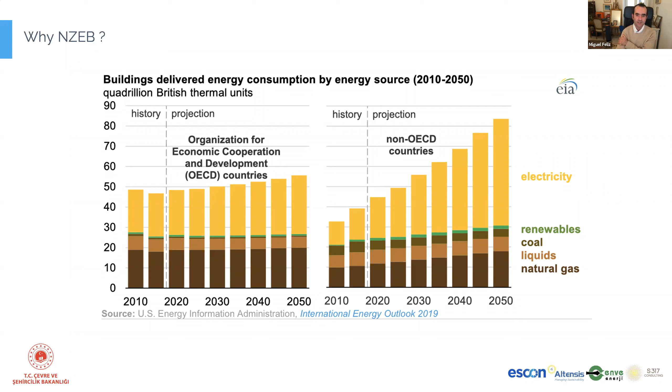Every country has buildings in their wish list for energy outlooks. Turkey has a plan, that's why we are here. Portugal has a plan. Everyone wants to keep the building sector in check regarding energy consumption, especially in the future, and the trend is really clear.

So it's 20 to 30% of the total energy use, depending on the source that you use, but it's 30 to 40% of the carbon emissions. It will grow, and all the reduction targets will require that buildings reduce consumption, or at least keep it steady in the near future.

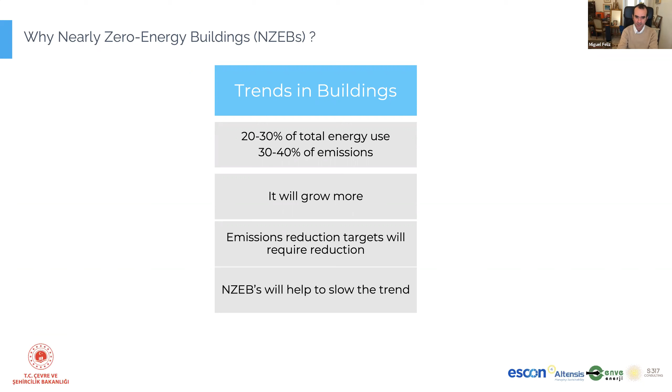So net zero buildings will help slow this trend, and that's why they keep popping up in all the conversations regarding buildings and regarding energy. So firstly, this is important to set the conversation.

What is the N in the nZEB sentence? So it's net, it's nearly, it depends a lot on the source that you use, the country you are in, or the idea that you want to represent. For example, in the United States, it's the zero energy building, so the building must be completely with a zero balance between the outside grid and the energy consumption.

The Green Building Council is slightly different. They only say that the building is highly energy efficient and is fully powered from on-site or off-site renewable energy sources. And in the European Union, the concerted action of the EPBD, which is the directive on energy efficiency in buildings, says that 40% of member states don't yet have a definition.

So what I'm trying to say here is that the definition of net zero or near zero in buildings is a fluid definition. So what we're trying to say is that they must be efficient, and there's always a role for renewables to offset the consumption that buildings have. And then there's always a question: are we talking about final energy, primary energy, or emissions?

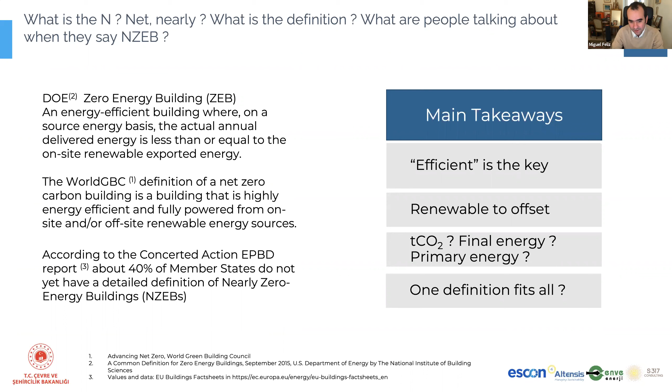It's not possible to find one definition for all geographies and for all the entities that relate to this. This is important because near zero, net zero, above all, is an idea, a concept that can relate to reality, to real world buildings, in several ways.

Some might say that this is a rich world problem, a developed world problem, because the consumption in buildings normally comes from air conditioning, lighting, and people. So it's mainly a higher income problem.

Right now it's true, the overall energy consumption, like we saw in the first graph, is higher in the developed countries, and the per capita, per square foot or square meter energy is also higher. But the situation will evolve because, as you saw in the first graph, the increase in consumption is growing a lot more in the underdeveloped countries.

So this will be a global problem, and the consumption in buildings will grow everywhere, not just in the developed countries. And the new buildings, which are much easier to take care of because they are made from scratch, are now and will be a fraction of the building stock.

So if we want to take care of something in the building sector, we have to move and take care of the existing building stock. It's very difficult to change this in the foreseeable future, and it will be a huge effort to take care of old buildings. There's a lot of residential buildings built before the 1970s, when the first regulation regarding energy efficiency came up in the European Union.

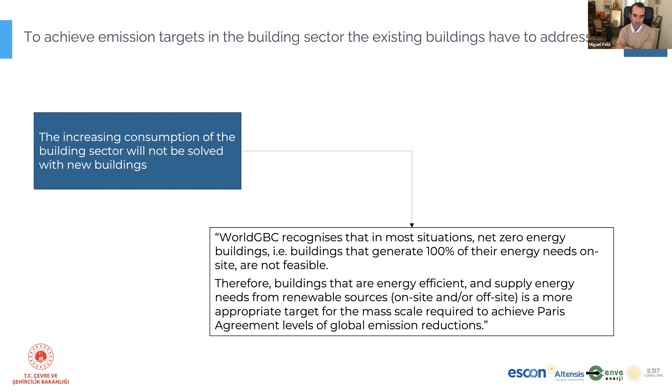The buildings can be efficient, they can be really good in taking care of people, but we have to rely on renewable sources, on making the difference between on-site and off-site consumption, to get a grip on the emission targets and achieve all the agreements that are there for global emission reductions.

For this, we have to make sure that we understand what causes consumption in buildings, starting with our own buildings, so commercial buildings, not mentioning residential buildings, which are a different concept. We know that in commercial buildings, HVAC - heating, ventilation, and air conditioning - represents around 45% of energy consumption, and lighting around 17%.

Other loads, like plug loads for example, represent a little bit over a third of energy consumption. We know that commercial buildings are 40% more energy intensive than residential, and that, for example, in the European Union average, 36% of consumption is natural gas and 32% is electricity.

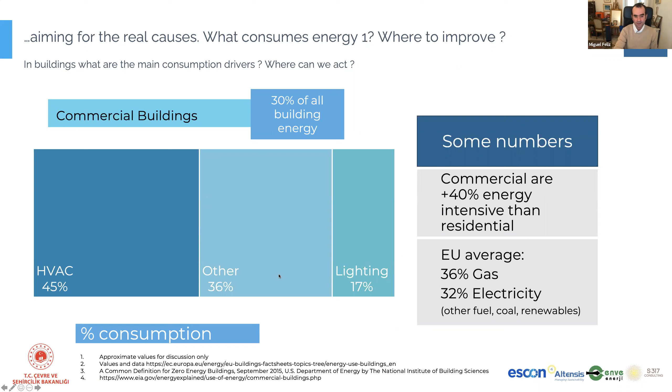So we have a good idea of where to start when we think about reducing consumption - it's all about climatization, ventilation, and lighting loads. These are also the easiest to take care of, because it's really difficult to tell a hospital, for example, to take out all the medical equipment from the energy plug. So this other 36% charge is difficult to take care of, and it's really money consuming to address.

So we have to search for the economical rationale to implement all this. We know there are things we can do that are much easier - for example, it's easier to take care of management and operation, it's almost a no-cost measure. It's easier to take small measures instead of big, expensive measures.

And we have to search for going electrical, for example, to have more efficient equipment, more renewables, and take care of building management systems - to have everything that takes energy from a building smartly managed.

So the idea is to take care of what is cheaper and easier to do, and keep an eye always on the economical side of all this, because as we will see in detail a little further in the presentation...

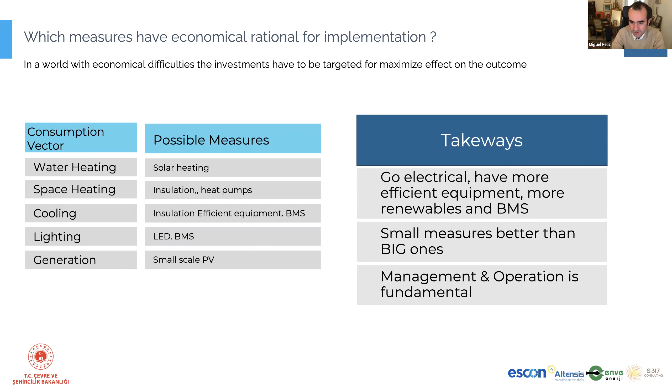It's okay to talk about energy reduction and net zero and so on, but we have to make sure that everything we try to get the market and people to do has a mandatory economic rationale, because if not, you are always just designing laws and ideas, but no one is able to make them work in real and practical terms. So it's really important to know what the market can do efficiently.

The near zero examples, if you look in any Google search, you will always start by the great Northern European condominiums and small buildings that were designed or refurbished as nZEB in the near past. These are two examples, one from Austria, one from Munich. There are a lot of examples, if you search you'll get a zillion of examples. Almost all of them are in the north of Europe, and almost all of them are residential or small buildings.

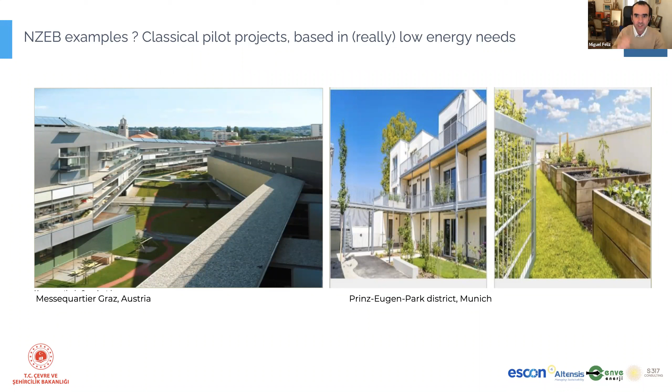So it's difficult with the idea of having a really low energy need in a building. It's really difficult to get the big old buildings, the hospitals, the big universities, the big courtrooms in the same category as these beautiful examples. You see a lot of green, a lot of very good insulation. They are always in the north of Europe because it's easier to manage, since there's a lot of heating and not much cooling need during the year. So it's easier to get a really low energy need for the buildings.

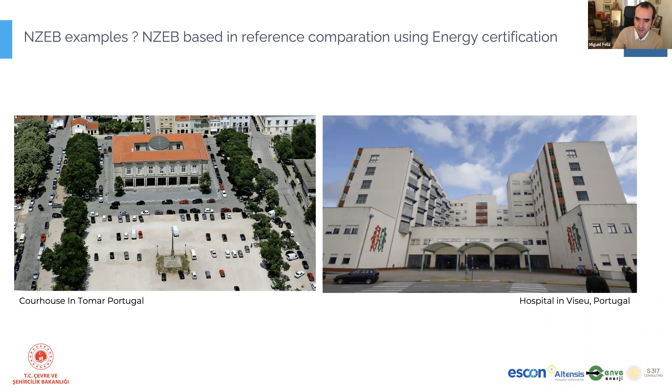This connects with the idea that I was trying to explain in the first slides of this presentation, which is what the definition of net zero buildings we are talking about actually is. So depending on the reference that you are using, you can get these beautiful, small, residential Northern European buildings, or you can get Southern European, Portugal, Turkey, Spain, Italy, old hospitals. These two can be two different sides from an nZEB idea.

As a summary of this first part, I would like to state, and try for you to understand, that nZEB is a liquid definition, so it will evolve. It already evolved since 10 years ago, and it will change. The energy in buildings is mainly right now a developed world problem, but it will be a worldwide problem. Net zero buildings, whichever definition we are talking about, will help a lot keeping this problem at bay, keeping the consumption low. And with different definitions, we will get different interpretations of the rule.

So it's important that after this presentation, in the near future, when you speak and think about net zero, near zero buildings, you understand that it all depends on what we are talking about. We can have different interpretations, very different definitions, which may imply different techniques and different ideas about all this.

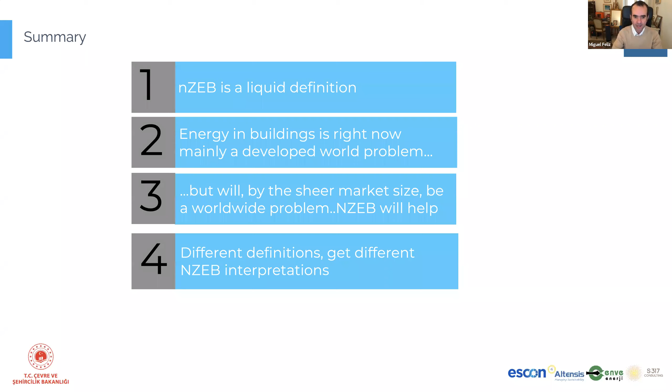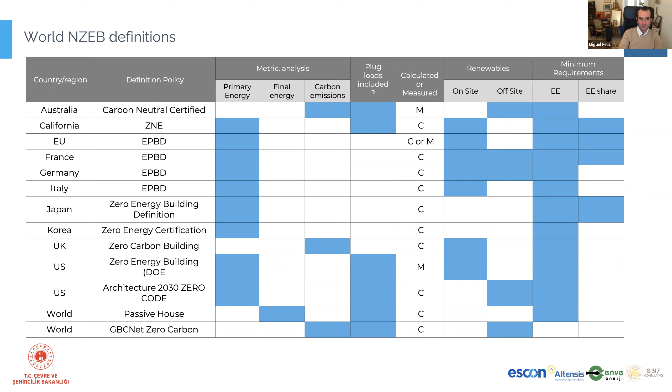And how are the requirements taken care of? So it's a share, a percentage, or an absolute value. We see that almost every country, almost every system, has a hardwired minimum requirement value for this. This chart tells you that there's a lot of different assumptions, a lot of different approaches to this thing.

But we can see one thing. So we are always talking about primary energy, final energy. We have to take care about the plug loads to tell how they behave on these. Do we calculate or measure? How is the role of renewables? And how are the minimum requirements expressed?

We see that on average, the countries and the systems talk about primary energy. They don't take care of plug loads; they are out of the equation. All the values are calculated, not measured. The renewables are normally on site, and there are always values for the minimum requirements. We can say that these are the five main guidelines for analyzing this issue.

It's important to see that all the different concepts, all the different interpretations, they always rely on these issues for telling someone that the building is an nZEB building or it's not an nZEB building.

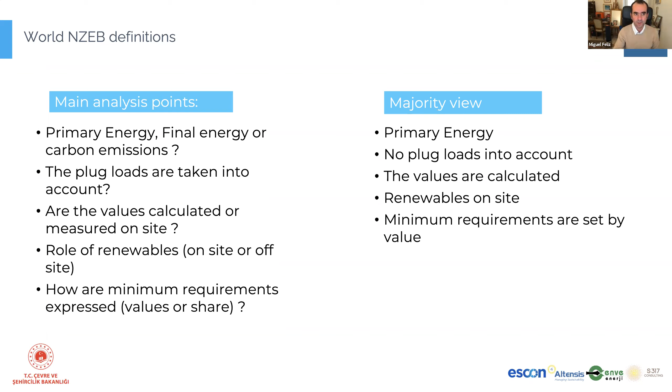So let us focus, like I said before, on the European Union. I focus on the European Union because it's probably the most complete, the most advanced system around the nZEB idea. There's a lot of directives from the European Union, a lot of laws that all the countries are obliged to make, and it's a fairly good system that could be a good example for this presentation, and could be a good example for the future Turkish legislation regarding this.

So there are four main sentences, four main ideas for this, which can relate to three, but we must start by saying, like you see in this table, the idea of net zero is to reduce the current requirements. So the energy use must go down. And from the future low energy use, some part of it is from fossil origin, so it's gas or fuel or whatever, but the other part must be renewable.

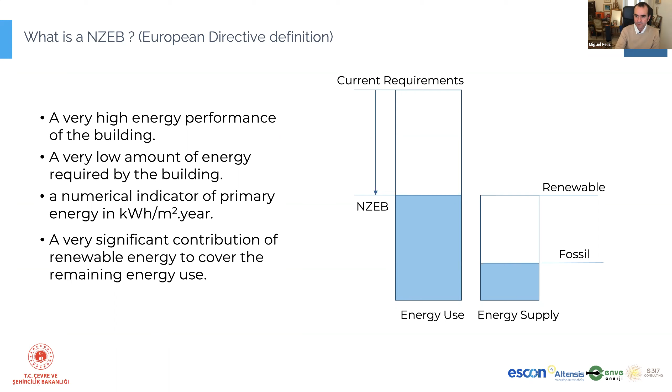So this chart is the most important chart of all these. Energy use must go down, energy supply must have a strong renewable source. And we can see this in the four sentences: we should have a very high energy performance in a building, a very low amount of energy required, a numerical indicator of primary energy, and a very significant contribution of renewable energy for the remaining energy use that we cannot decrease by changing the requirements or the system or the current energy use.

Let's go in detail through this definition. So firstly, a very high energy performance of the building. This is really tricky because it could have several different definitions, and even us in conversation we can come up with several different concepts regarding this. But the idea is that the current requirements have to go down for existing buildings, for example.

And the nZEB threshold for energy consumption must be lower, significantly lower than the one we are used to see. And the energy use of a high performance building has to be really low, while trying to keep up the indoor comfort conditions. We see that a lot in Portugal, for example. I think Turkey has the same problem: we see a lot of buildings that don't consume energy because they don't have heating, cooling, or proper lighting systems. So that's not the idea.

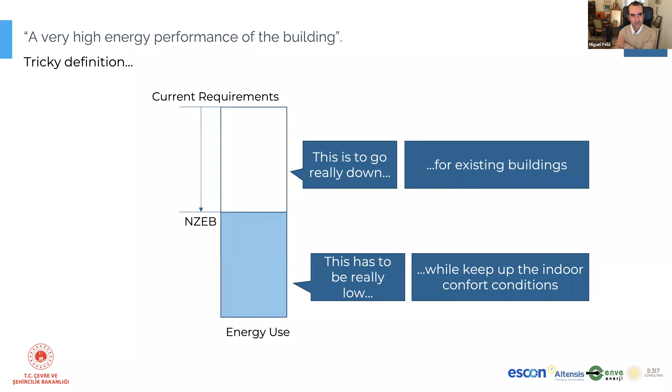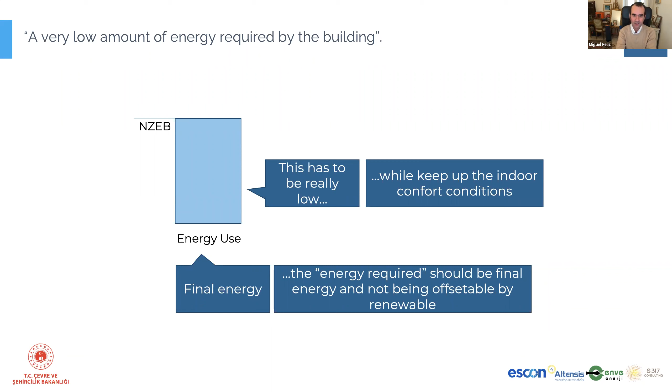Again, the second rule is a very low amount of energy required by the building. So we are now in the building needs, not in the energy supply - we are in the energy use. The final energy has to be low, and the energy required should be this final energy. The idea is to separate what is consumed in the building from what is supplied to it. We don't want buildings that have high energy consumption even if all of it is renewable. The building load has to require a low amount of energy: good insulation, good fenestration, very efficient systems.

We have to put a number on this - that's the message of the third idea. So we talk about energy supply, the energy intake of the building. We should always try to put a number on this to know what is low consumption. They say there should be a numerical indicator of primary energy in kilowatt hours per year per square meter. The idea is to know the fossil, the non-renewable energy supply that comes through the building.

So what is the maximum we're supposed to take when talking about net zero? We should have a zero right here - if you're talking about net zero, we should have near zero, so a low value is needed, but there should be a numerical indicator. This is the most difficult thing to do. If you look across Europe, there's only a small amount of countries that could have done this.

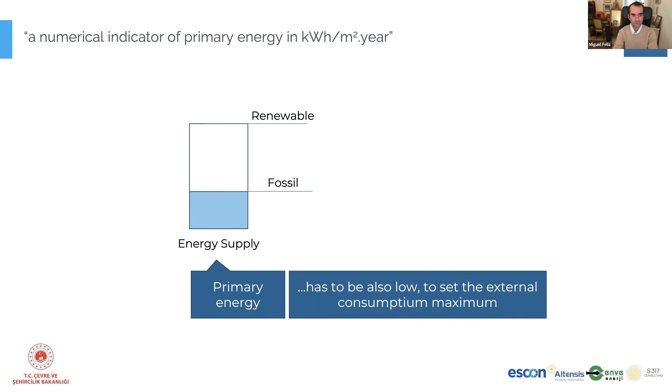With reliable numbers, we talk about this a bit further in the presentation, but it's not easy to set up these values. Finally, we should have a very significant contribution of renewable energy to cover the remaining energy use - the remaining energy use being what we cannot take out of the building through energy efficiency or envelope measures. But we have to make sure that from the small energy use the building has, a significant amount is from renewable sources - whether on-site or off-site generation. We can discuss what counts as significant: 25%, 50%, all of it - that's open for discussion, and there's a lot of different opinions in Europe regarding this.

But the point is, we have to make it renewable. This indirectly plays a role in the measures and style of audits we perform in a building for nZEB, because we can only make renewable what is, in a sense, electrical. So the electrification of all consumption is a goal in all this. We have to take out the fuel, take out the gas, make it more friendly - almost electrical or biomass or something - but we have to make sure that all the energy use we do can have a renewable source behind that supply.

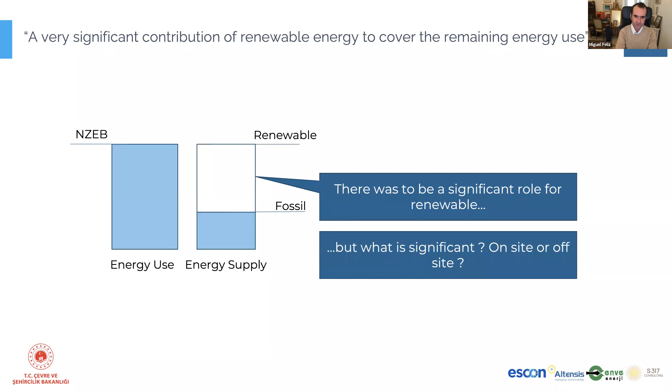So, time for a short quiz: the 3 main nZEB rules. We've talked about them already, so I don't know if you can tell them, but we are talking about a very high performance building, a very low amount of energy, and significant renewable energies. These are the 3 main topics of the net zero rules that are important for this conversation. Everything else can change, but these 3 ideas have to be in place to know if this is a viable net zero building, near zero building, or if it's not a performant building.

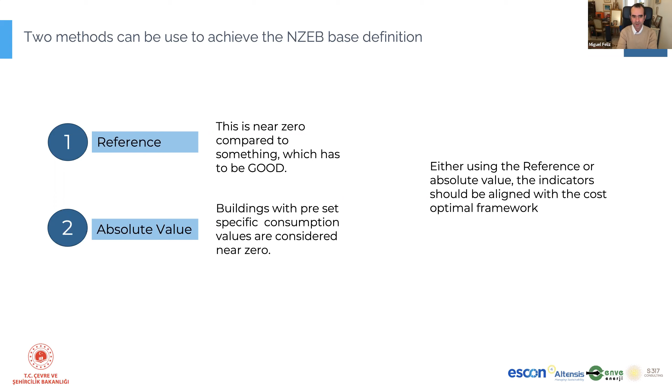So the reference, like I said, for example an A class is considered near zero. It's okay, perfect, understandable. You can change the A class for the A-plus class, for example. There are some pros with this method: the impact of the climate zone is taken care of, and the building type is taken care of. We have to agree that the classes of buildings change according to the building type, so an A class is different in a hospital, or different in a school or a residential place. This is taken care of, but we have to make sure a very strong reference is needed, and the calculation of the reference is also important -- it's not easy to calculate, right?

You always have to make all the calculations for setting up the energy class of the building, which sometimes, depending on the countries and the systems, is not easy to calculate. The near zero can be not zero or even near zero, because an A class in Portugal or in Turkey is about the same, but it does not translate to near zero consumption - which is sometimes difficult to explain to someone who doesn't understand that a near zero building does not equal a zero consumption building.

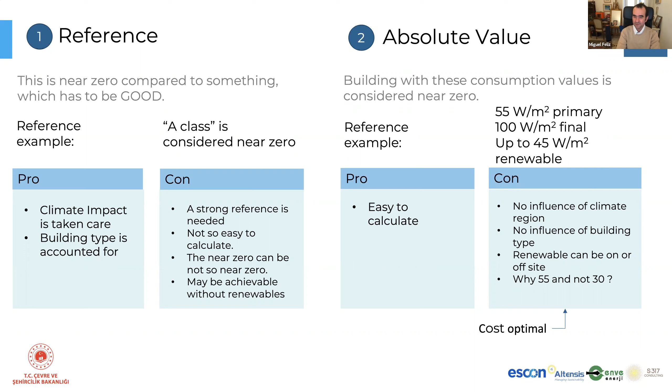But the idea here is that we may have these two different concepts. This is an example from Portugal - fairly complicated, sorry about that. My colleague Serkan had a lot of conversation before he understood this, because this is our legislation. For us it's really easy to understand, but it's a system that is not - well, it's not the Turkish system, so it's difficult to say.

This is an example of a certain way of doing this analysis based on energy certification. We only have two things we must take care of. First, the building has to be better than the reference building, and we have a class A for this. Take notice that in our system we have the A plus energy class, but for our near zero building we say the minimum is the A class - so for us it's not even the best class available, it's the second best.

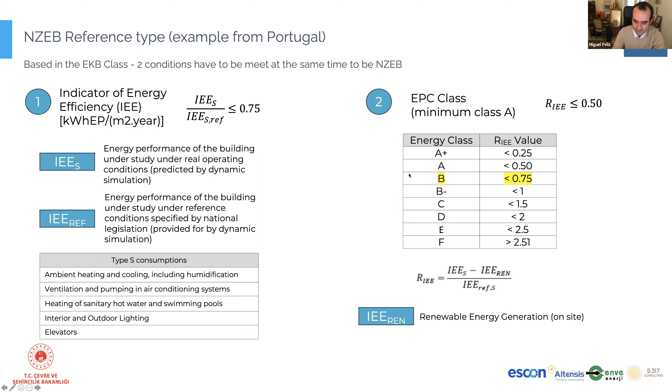Let me try to explain this a little better. It's not exactly like this, but the idea is this: you have to be better than the reference. The reference for new buildings in Portugal is class B, without any renewable contribution. And with the renewables, this has to be much better than the reference - so twice as good as the reference has to be class A.

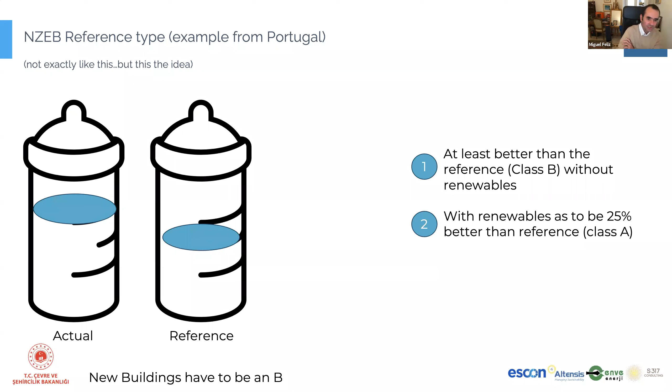For example, if the building is like this - a little more than half full of a bottle, like a baby formula bottle - the reference is half of this. So my building has to be class B, meaning my actual building has to come down by 25% to be on the reference. And finally, for achieving the near zero energy building certification, you have to decrease by another 25% from the reference value.

So our near zero is not zero - it can have a huge consumption, but what we're trying to say is that our near zero is better than the reference and much better than the actual state of the building. So we know we're decreasing the overall consumption by roughly 50%. Sorry, not the consumption - the energy intake. We are reducing the final energy consumption of the building by 25%, and we are reducing the intake by another 25%.

This is a fairly easy approach for near zero buildings. Keep this in mind - this is an achievable definition. We are not telling the economy to do impossible things, but we have to explain to people that the near zero could be not so near zero.

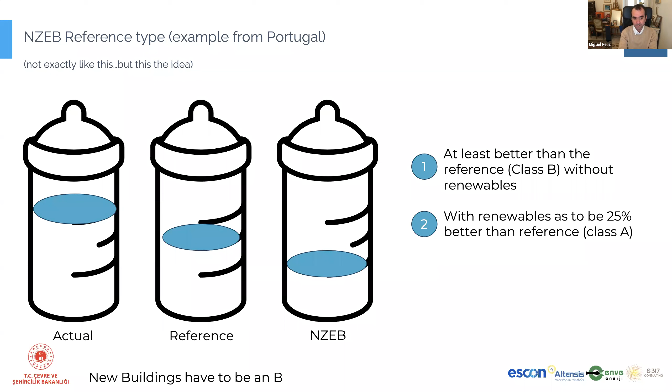To be well done, this has to be done according to the cost-optimal approach. This is in all definitions of the European Community rules, and it's really important to keep this in mind, because when you try to have a proper nZEB legislation, you have to spend a lot of time doing this. Why 55 and not 30?

The cost optimal is a fairly easy concept to explain. We have this energy consumption in the building, and we know that to reduce energy consumption, we have to increase the cost of installations. We know that if we want low energy buildings, we have to spend money on insulation, new windows, and new systems.

But there's always a sweet spot for this, when my investment equals the least energy that I consume. Because afterwards, I'm going to spend a lot to decrease my consumption further, and before that point I'm also spending on high energy consumption. So there's this sweet spot where everything has to be set around.

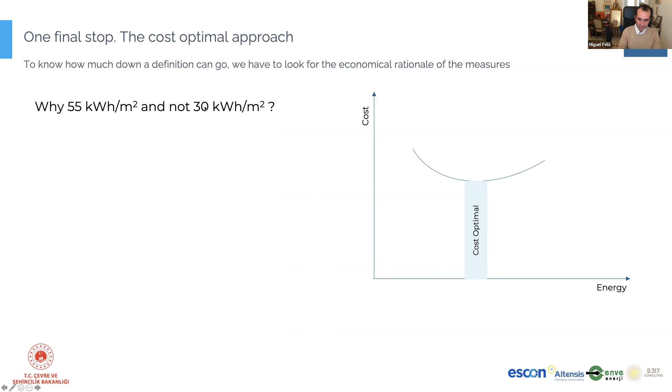If you do this properly, you will determine for each type of building and each building location whether we're talking about 55 or 30, because we are going to simulate and create a reference building. We say, for example, small office buildings, big office buildings, small hospitals, big hospitals, so you can have a matrix of 30, 40, 50 buildings. We change the technologies in this reference building and see what is the best NPV - the net present value of investment versus energy consumption - for the life of the building. We use the best NPV for the best technology.

If we do this for a sample big enough, with different HVAC systems, different pumping systems, different ventilation systems, versus different insulation systems and fenestration systems in the same building, we will get a number to see if we are asking for 55 or 30.

Just to give you an example of the difficulty of doing this: one of the Portuguese universities, with an energy government lab, did this for a small office building in Lisbon. They changed the load of the building - insulation and the cooling system used - and sorted out a matrix of 96,000 values, just varying insulation versus cooling system. After this calculation, they knew that the least consumption a small office building in Lisbon could achieve was 65 kilowatt-hours per square meter per year. That set up the reference building for that kind of building, which they later wrote into the Portuguese nZEB legislation.

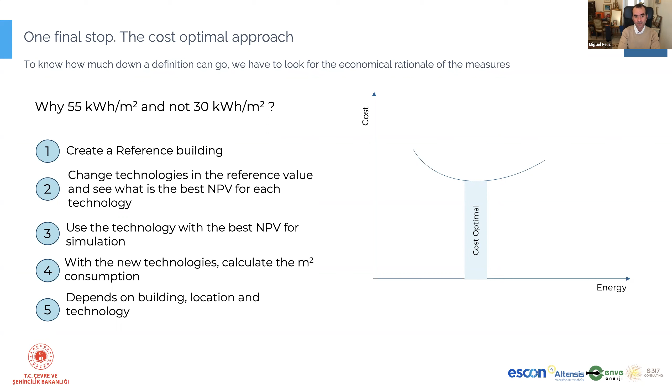So it's a very difficult and time-consuming thing to do, but it's a very transversal analysis that everyone has to carry out to know what the reference value should be.

I talked about this - there's a difference between reality and perception that we have to make sure we understand. In this project too, when we finish the pilot, I think for sure a politician will say that now we have a building with zero energy use, zero electricity invoice, which isn't real. In reality, we always have some consumption in the building, and net zero is never truly zero. There's always something going on with fossil consumption that's difficult to get rid of. But the perception will be that this is a zero consumption building - we have to make sure we all understand what we're talking about when we say zero energy buildings.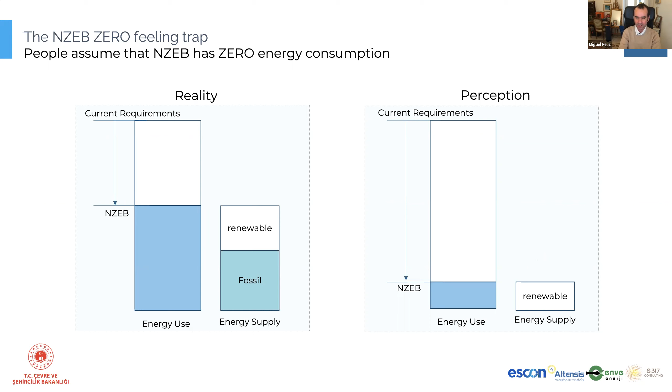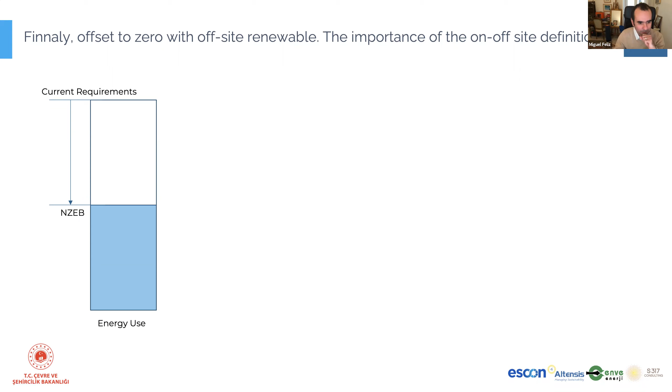And finally, the story of off-site versus on-site - it's really important. We know we have the final energy use of the building, and the nZEB requirement is lower than the actual requirement. But we know that, theoretically, we can have on-site renewables and off-site renewables, and we can have zero primary consumption in a building.

It's not that difficult - I think you have this also in Turkey. You can sign up for a green electricity supply from one of your normal suppliers, with a guarantee that the energy the grid supplies to you is green energy. We can say this green energy is off-site renewable. So it's not difficult to do or to understand - it's not difficult to have zero primary energy consumption using off-site renewables.

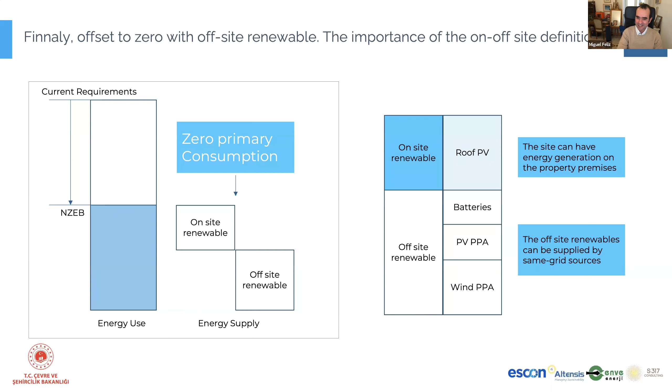There's a lot of different ways to get this done. For on-site renewables, you can have a roof photovoltaic system - it's normal to have; I saw a lot of photovoltaics on roofs in Turkey. So you can generate that on your premises, in your building. The off-site renewable option right now has a lot of choices - not only the options available a couple of years ago, but right now you can have a PPA.

You can have a power purchase agreement with someone that sells photovoltaic energy from a site that is not near your building. You can have batteries, and you can even have a wind power purchase agreement. And with this, you can have something that was impossible a couple of years ago: making sure you have renewable energy during the whole day. So you can have off-site renewable during nighttime, off-site renewable during daytime, and with the batteries, you can rely on peak power consumption also being on renewables.

So it's really important right now to have this idea well explained of off-site and on-site, because you can have a fully loaded building just running on renewable energy right now. It's not difficult, it's not that expensive, and it's a good way to think.

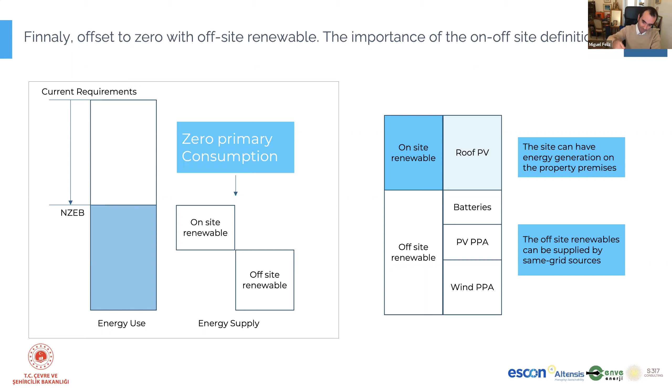So in each definition we use, we have to make sure we understand what we're talking about when we say on-site or off-site. For example, the Portuguese legislation took care of this. They say it's on-site if you're connected to your building, not on grid, but the power cable has to go inside your building for this.

So the summary of this second part, before we have a quick break for coffee after your lunch and before mine: the idea of near zero is clear, but there are a lot of different interpretations. No country uses it in the same way, so Turkey can have different legislation from what we're talking about here. There are two trends, reference value versus absolute value, and it's important to keep an eye on public perception. It's important that regular people understand that we may not be talking about zero energy consumption buildings, but good buildings regarding energy consumption.

So if you have any questions, please just shout, I'll be here. If not, we'll see you in 5-10 minutes for our second part, which is more practical and more related to our KABEV projects. See you soon.

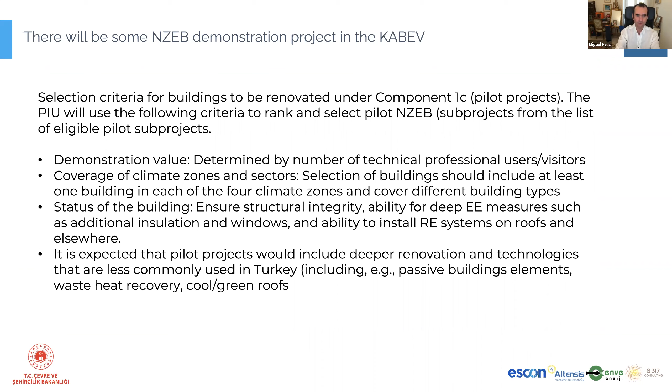The idea was that the buildings could include deeper renovation and newer technology that isn't common in Turkey regarding buildings—passive house building ideas, waste heat recovery, cool and green roofs, and so on. This was the first idea, but we have to make sure we do this with economic rationale, because otherwise the demonstration value will only be for one architect or one ministry, not for the market, which is the overall objective. In our operation manual, there was a definition of nZEB for this, and it was an absolute value reference.

We already talked about this, so the idea was 4 ideas mainly, which took all the right notes regarding the definitions that we saw before. So it was set up a numerical value for net primary energy, numerical value for primary energy and renewables, and overall savings from the building, which implies that the building has to be in the future a high performance building. And finally, the class was an A class, the best class in the system for the best building in the system.

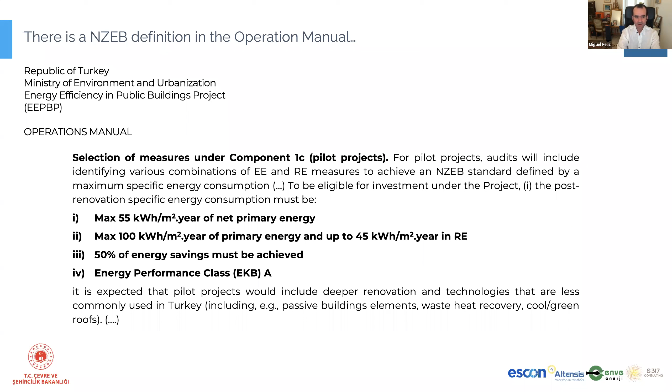So this is pretty much okay, pretty much perfect as a definition. We see this kind of definition in a lot of countries, for example, Denmark, Germany, Poland, Italy, in a bit, some kind of definition is very similar to this one.

And the ministry already did studies regarding nZEB definitions. So I think you will probably know this. We had it translated to English to understand everything that is written there. So, but well, they took different building end uses, educational, offices, healthcare, and residential. They put the buildings in each of the 4 climate zones in Turkey, and they used it with the software that they normally use for the energy performance certification in Turkey.

So, and they come up with a sort of optimal cost analysis, and it's fairly informative, and it's fairly fair work that can be the basis for the future work that has to be done in a different way or in a more deep way to have these calculations for the cost optimal done.

So they did this, and what they say in the end of the document: net zero definition, near zero definition cannot be determined on a fixed energy consumption value because of regional climate differences, building functions, and different demands originating from different indoor thermal comfort equipment. So if we do a fixed energy consumption, a number for this, we have to make sure that we have all the climate zones represented, all the building functions represented, and different demands, different efficiencies from different systems that are on the building. See that this relates with a couple of things that we discussed already.

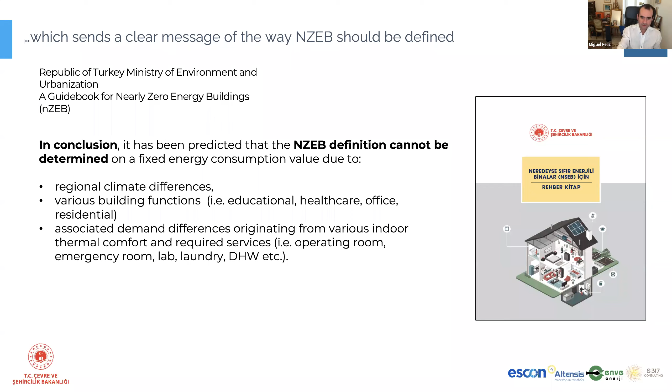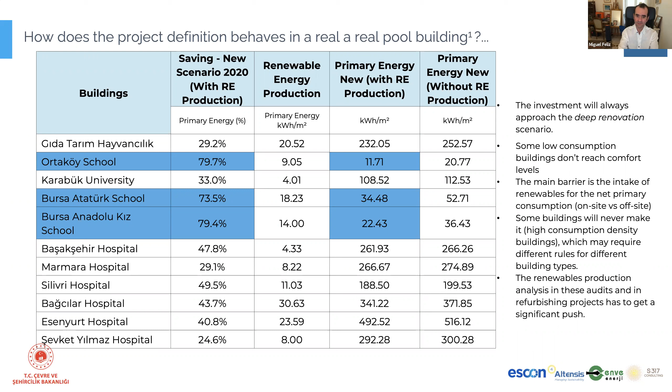There's an issue with the renewable production. So if we assume that we have to have a large part of the energy profile being done by renewable sources, it's difficult to do in large buildings and in high consumption buildings, the hospitals, for example. So it's difficult to find space in a hospital to have the kind of photovoltaic production, for example, that we need for these issues. So we have to make sure that we can adapt the definition to the system and to the reality of things that we have. So regarding the definition that we have in our operation manual, there are things that have to be improved.

So other things that are really good: the 50% energy savings, it's very good. We have to make sure that we save. When we have a refurbishing of an existing building to make it near zero, we have to save a large percentage. 50% is perfect, could be higher though.

The A class is coherent, right? Because it's the best class. So we have to make sure that we have the best class for the best building. There are things that we have to make sure of.

Up to 45 kilowatt hour of renewable energy means that if the building consumption is low, we can have zero energy, renewable energy, which at the same time can comply with the norm, with the definition, but it's not the idea. The idea is always to have some renewable source here, and we have things that we have to change.

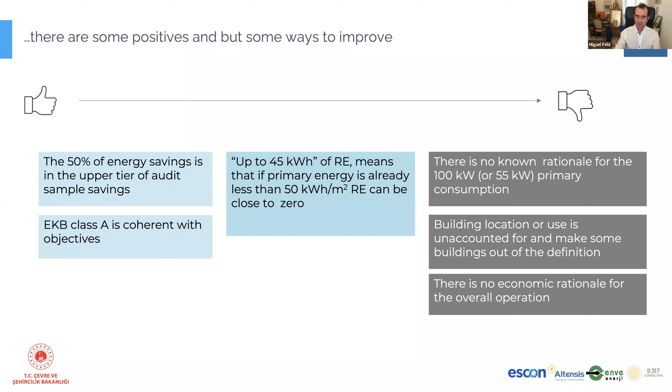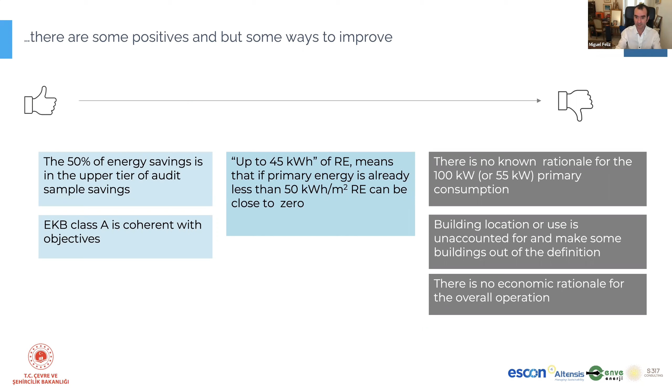And we have to set up some sort of economical rationale for the operation, because if not, it will be impossible to do. We would just be spending money, and it's difficult for this to be implemented in the real world, even if it's the World Bank paying or if it's the government paying, because someone has to take charge of the first bill, the first invoice of all this.

So we propose to use in our project, in our pilots, a reference-based approach.

The EPC, the performance class, cannot be used as a sole reference because our Turkish system is not flexible for this. So the software that you use, the way that you use the architecture types, it's not very good for doing this. There are not enough HVAC systems, for example.

So it's a very closed definition, a very closed system to use. We don't have cost optimal studies for setting values.

So I told you, right, it's a lot of time. These studies have to be done, but they are not done yet. So we cannot rely on cost optimal for these pilot projects.

We also don't have a large pool of detailed audits. If we had 1,000 detailed audits of 1,000 different end types, use types, we could say that on average a very good building has X consumption, but we don't have that pool.

And from the pool that we have, well, dozens of audits already done, we have a lot of buildings that have an artificial low consumption. Like I already told you, it's a school without heating, or a hospital without proper lighting systems.

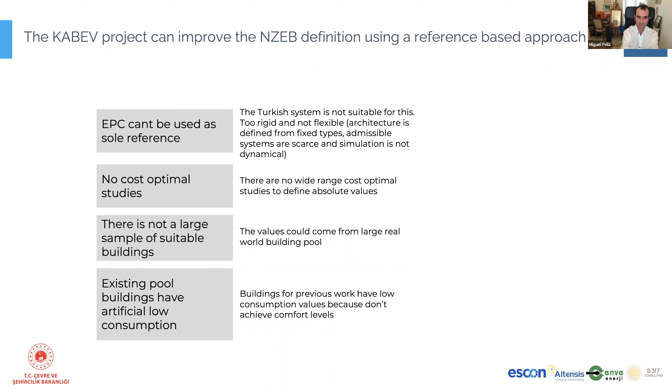So we have to define a reference, but in accordance with the building behavior. So we propose 5 requirements for this.

Energy savings has to be big, so we put here 60%. So from the original building to the new building, we have to make sure that we save a lot. The class has to be A class.

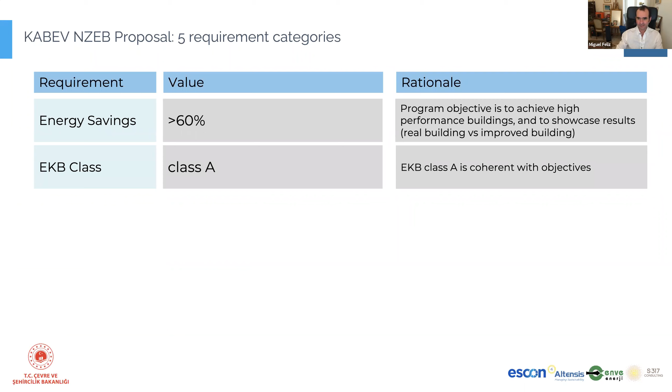We keep this from the definition, it has to be a good building. We say that up to 50% of final gross primary energy has to be made of renewables. We say that primary energy consumption has to be calculated against a reference calculation.

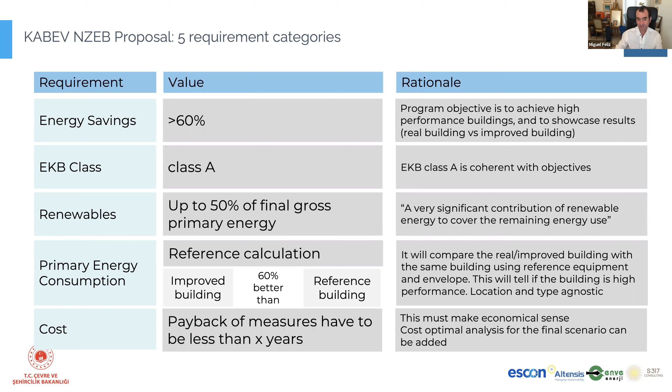And we say that the improved building has to be better, 60%, for example, better than the reference building. We will compare the real building with our improved reference building. And the cost of all this, of the bundle of measures, has to be payable back in less than X years—30 years, for example, or 20 years, it's up for discussion.

How are we going to do this using the reference building? This is the basis of the energy certification in France, Portugal, and Spain, for example. We have one building model, and we will create 3 different inputs for the building model.

3 inputs which relate to the reference, which is our reference building; the actual building, which is our baseline, our real world building; and the improved building, which is the future building, when we implement all the measures that we anticipate and calculated for having a high performance building in the future.

There's a couple of things that are equal in the 3 inputs: the building architecture, the occupation profile, and the plug loads are the same. This makes sure we are always analyzing the same building. It's the same hospital in Istanbul, the same school in Ankara. We always use the same school with the same people in there, with the same plug loads, taking the plug loads from the analysis of a net zero or near zero building.

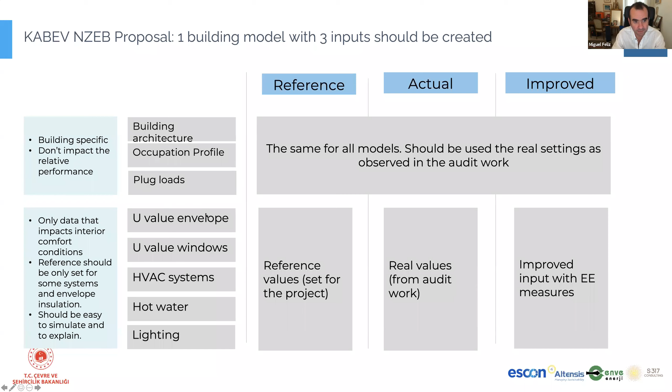And for the improved model, we will do like all the audits, right? We are going to use what we proposed to change from the real model to the improved model. We'll change insulation, we'll change the chilled water production, we will put some renewables, wherever. But we are going to use these while always using the same building architecture, the same occupation profile, and plug loads.

What reference values to use? We have a couple of examples. This reference idea is not something we came up with ourselves. The EPBD uses these normally in several countries. I told you about Portugal, Spain, France, and a couple of others that use this reference.

For the values, the EPBD, the European Union system, specifies different values depending on climate zone and type, but generally from 0.4 to 0.7 watt per square meter Kelvin. For HVAC systems, we are going to use, they assume that the COP or the EER are 3, for example. And we assume that the reference system is there if nothing else is installed.

I will come to this in the next slide. For example, we specify that the normal reference boiler has an efficiency of 95%, for example. And we assume that the lights have a DPI of 2 to 4 watt per square meter per lux.

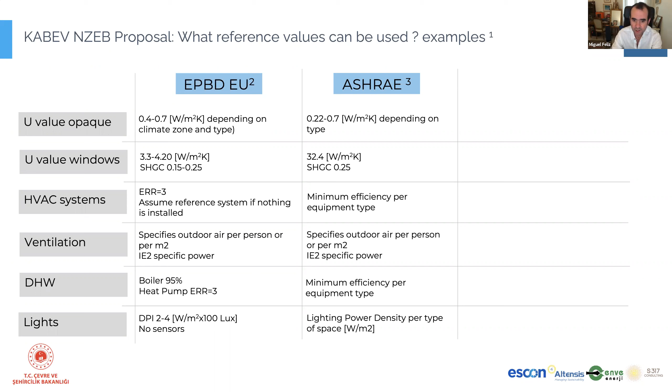So there's a couple of different approaches to this. The European Union uses these values, but for example, ASHRAE norm 90.1 defines another approach using the same idea, but defines it differently for each of these 6 categories of references. And for example, EDGE, which is another system paid by the World Bank, uses another set of references. But as you can see, there's a fairly common approach for this.

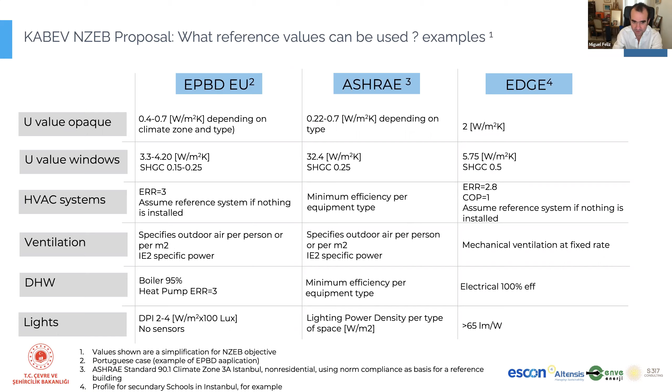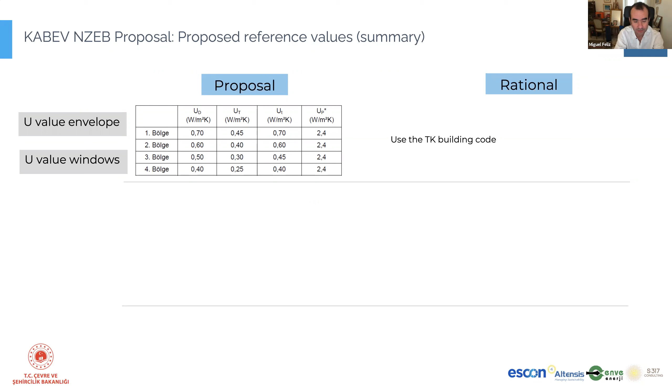What do we propose to use here? For the envelope, for the insulation, walls, ceilings, floors, windows, and so on, we propose to use the Turkish building code. So our reference is this one. Even if the building could be lower than this, the reference has to be this one. So our near zero building has to be measured against this reference. It's not very good, it's not very bad, it's a reference.

For the HVAC systems, we are going to say that the COP is 3, and we are going to assume that the reference is there, even if in the real model, nothing is installed.

What this means is that if the building has low actual consumption, real consumption, because they don't have cooling or heating, we know that our reference would have cooling or heating. So the baseline will be higher in the reference building than in the real building. And because we are comparing our near zero building, our nZEB building, with a reference, we don't care if in the real world you don't have the air conditioning installed or connected, because in our reference you will always have an air conditioning system.

The same for ventilation and the same for water system. So we specify with a table how much ventilation the building should have. For example, you cannot have a school without fresh air intake. Normally you get that intake by opening the windows, right? But in our reference building, we are going to say that each student has to get 30 cubic meters of fresh air per hour per student, for example.

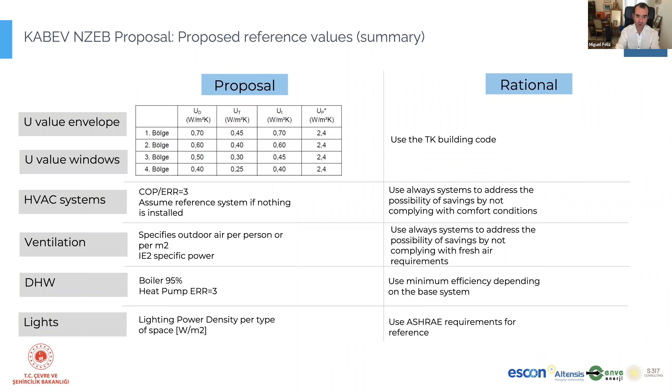This will help a lot on having a strong system put in place. We are going to say also that the overall payback time will be less than 30 years, for example. We are jogging with this - some people say 20 years could be okay, I, for example, say that 40 years could be more useful. But the idea is to have this economical benefit for the overall building package.

Which will make sure that some measures that are really good, really easy to pay for - for example lights are always a good example, which has a really short payback - can be on the same accounting as, for example, insulation, which is always difficult to have a good payback time. So in the overall balance, in the overall bundle of all the measures, we can get, like in this example, 17 years, which is perfectly reasonable for this.

It will be our reference for economical value of the overall thing, because we don't have enough cost optimal studies for saying that this is perfect or not. At least like this, we know that this makes economical sense. So the bundle is 17 years, it's okay, it's less than 30, so let's go with this.

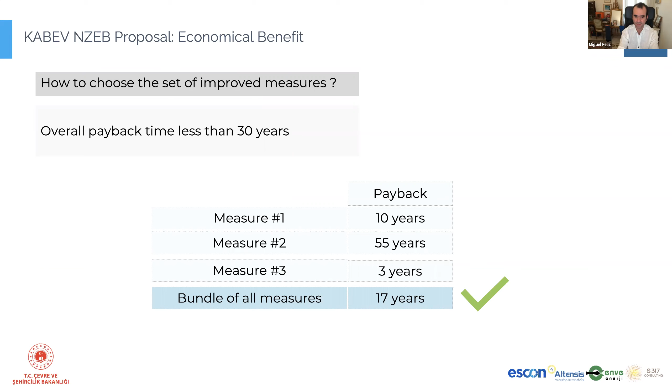We will study a little bit, we'll jog a little bit with the cost optimal, like you did in the ministry publication that we spoke about a couple of slides ago. So we are going to check, with all else unchanged, key areas, mainly insulation, for what could be useful. For example, if our real U value is 1.5, it's a really crappy building. Our reference value is 0.7 from our legislation.

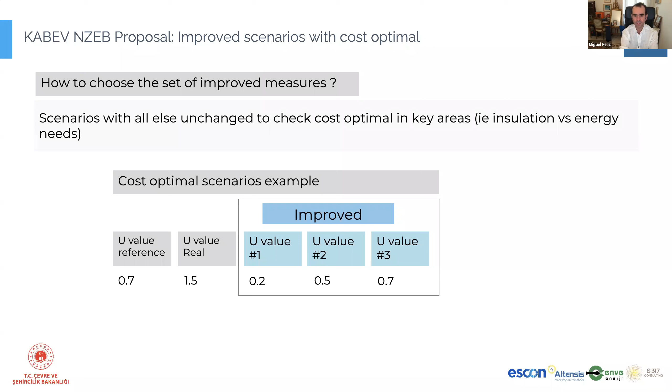We will do the following study: we will see how the building behaves with a 0.2, a 0.5, and a 0.7, which is the reference U value. And for each of these, we are going to measure how many savings there will be in kilowatt hours, how this relates to the economical savings, financial savings, how this will affect construction cost, how this will affect operation and maintenance cost, and finally, with all this data, what is the best NPV value for this.

It's fairly easy to understand that sometimes, and this is the concept of optimal value, the best value is not the 0.2, because the incremental value in kilowatt hour savings is not enough to make room for the unbelievable cost of this solution. So in real terms, we normally go for the average solution, which gets fairly good energy savings and doesn't cost that much.

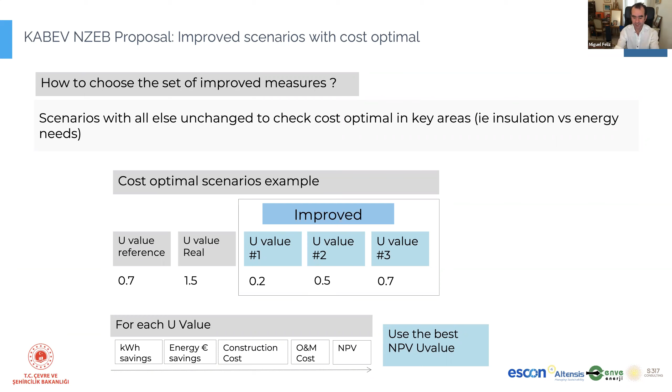We can always do kind of a multivariable scenario, like I told you, in Portugal with the 96,000 combinations. We can always make sure that we change the U value, and then we change, for example, the heating boiler, to see what is the best combination NPV for this. It's a kind of matrix analysis, which is more time consuming, but we could do this in particular pilot projects to check out what could be implied.

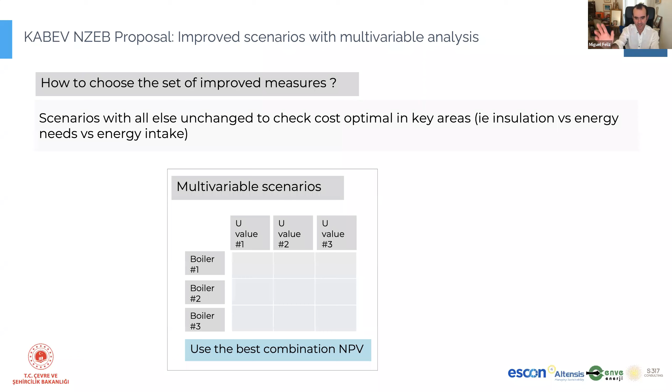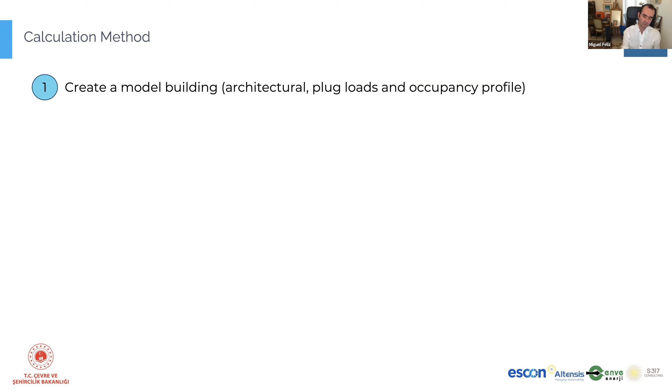This is the approach that the government will have to follow if they want to make a good cost optimal approach. So it's this multiplied by a zillion, but the idea is this one. So how are we going to calculate this? It's easy to explain, not easy to do, but easy to explain. So we'll create a model building. We'll use the architecture, the plug loads, and the occupancy profile of the real building. We will put all these into a dynamical simulation software.

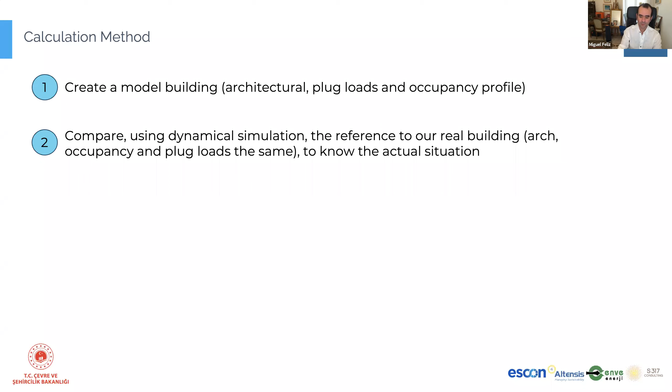So we will create a reference: architecture, occupancy, plug loads, to know the actual situation. We will propose the measures to achieve the nZEB, the percentage savings and so on, including the payback caps that we did. We will check afterwards the insulation or something else for the cost optimal scenarios, and we choose the final scenario and simulate against the reference building. The percentage of the difference will show the final nZEB status.

So remember that with this model in place, it's fairly easy to change the inputs and to simulate what happens if you use the real world building inputs, or use a reference building, or use the improved building. The key here is to build the model. I don't know if some of you are used to use dynamic simulation software, but after a little bit of learning curve, it's not difficult to do, and it's a very powerful system to check all these differences. But the basis is this: create a model, use the inputs of reference, real and improved, and see what happens.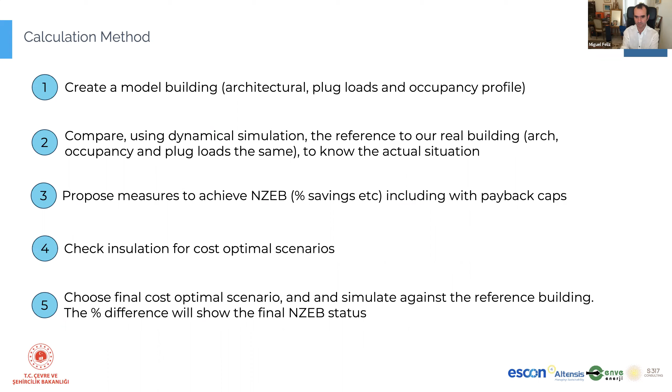The audits are different for doing this. It's a good question, good point, right? Because we want to make the audits that we are going to do for this project, for example, but in the future, we want to keep the audits as much the same as possible as a normal audit.

It's different because we are going to use dynamical simulation. I know that some of the audits that are already being done and were done in the past for this project use dynamical simulation software. So it's not a big thing.

We have to set up different conditions for the reference building. Well, that is a new thing, right? Because you don't normally use reference buildings, but we have to make sure that, for those important categories of building insulation and building equipment, we set up the good reference.

We use real consumption info to calibrate the model. So we have to make sure that the real consumption values are used for making sure that the model is well done. It's fairly standard for dynamic simulation. It's not difficult to do. It's not a big deal to do.

The conditions, of course, for meeting the nZEB requirements are new, right? We have to make sure that it's 55 or 60% of savings, class A or something, but we know that these numbers are calculated anyway in any audit that an engineer makes. So we are not asking for something different than the normal work that we do in an audit.

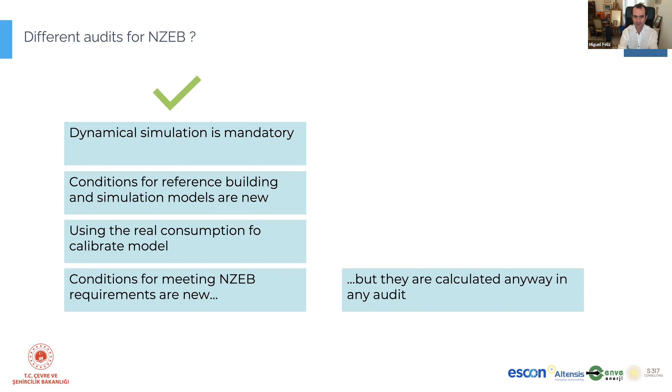Calculate primary energy, final energy — we do that all the time. So the audit is the same. It's not different because the field work is the same. So the measurements that we do are the same because we have to make sure that the improved and the real calculation is there. The consumption analysis is the same, right?

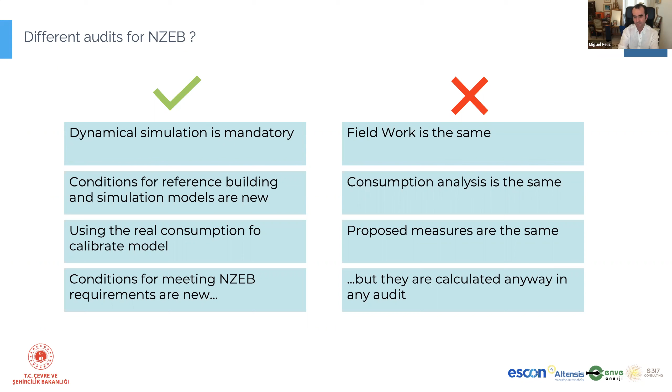We have to know how much consumption goes for lighting systems, for HVAC. We have to know that. The proposed measures are equally the same. So we are not searching for something different from what normal audits propose — maybe a little bit more measures, more deep measures, but the kind of measures are the same.

So as a summary of this, we build up from previous work to come up with a reference value. This reference has to be location and use agnostic. And for this project, we propose a method which is based on simulation software of a building reference to compare with the actual building and to compare with the future building.

Let's take an example of all this, how to turn a normal building into an nZEB building. Let's go for an example — it's not exactly the same because the situation is different, but based on the vocational and technical high school in Bursa. It's a fairly common school, built in 1980, so it's around 40 years of service. It's 13,000 square meters of floor area in 6 blocks.

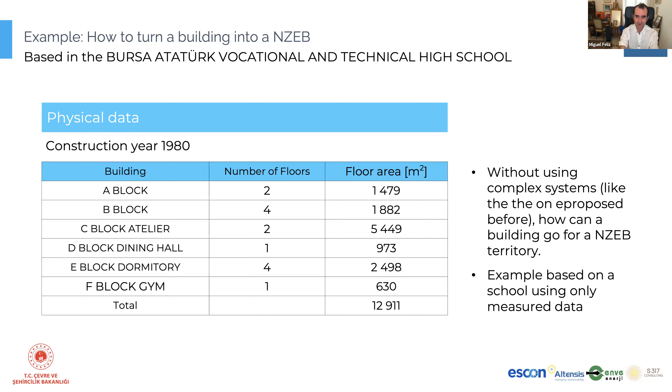We want to make sure you all understand what kind of calculations we are going to do. This is based only on measured data, not calculated data. And we have some premises for the example.

We have to assume that the building can maintain the required comfort levels, which is not particularly right in this case. The reference building method we proposed would not change the results, so we didn't do it for this example, but the end results could be the same. We also assume that the measures we will discuss will achieve an A class, though we didn't make this calculation, it's not complicated to assume we're talking about an A class building after all this.

The energy consumption we checked in our audit is this: a total consumption of 1.7 million kilowatt hours of primary energy. Relating this with the indicators we used, this consumption is around 130 kilowatt hours per square meter, so you get a feeling of the profile of this school.

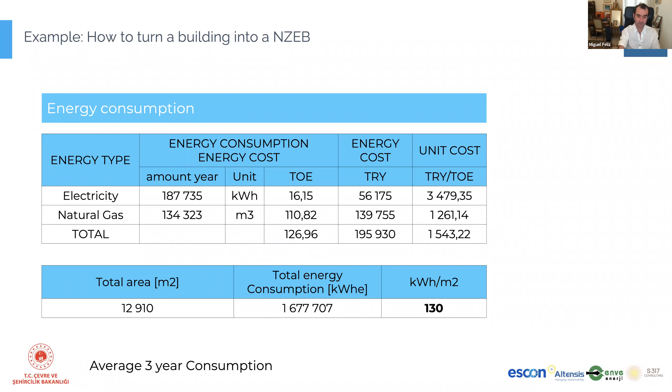So what did we propose for energy saving measures? We say we are going to put new insulation and new windows in all of the building, since it did not meet heat insulation standards. We are going to save a lot of natural gas because we decrease the load of the building. This is an objective of the nZEB structure, to decrease the required load of the building.

We also change the boiler for a heat pump, to take care of the rest of the natural gas consumption. Unfortunately this increases electricity consumption because the heat pump consumes electricity. We reduced light consumption by putting LEDs in every lighting fixture, and we added a photovoltaic generation facility in the buildings, since there's a lot of roof to put PV in this location. This is a fairly normal situation.

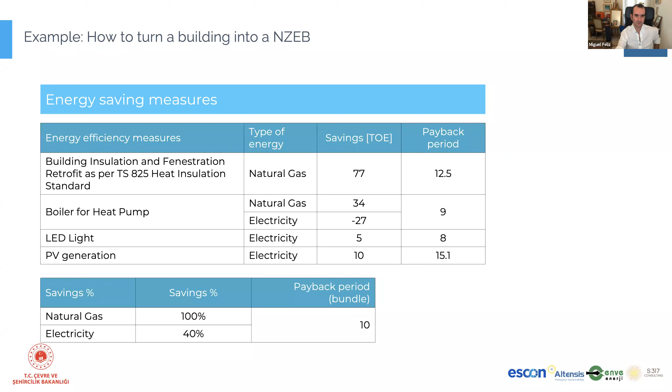With this, we completely wiped out the natural gas consumption, 100% of savings, and we decreased a little bit of the electricity consumption of the building. The payback period of all this is 10 years, for the purpose of this example, which is below the 30 years we specified as the maximum. So it's a perfect example of an acceptable economic value for these refurbishing measures.

So what will be the end results of this? Before we have 130 kilowatt hours, after we have 60 kilowatt hours, so we reduced around 68% of the base consumption of the building. We add up almost 20 kilowatts per square meter of energy production on premises, so the final primary energy consumption of this building is around 41 kilowatts per square meter. Sorry, these numbers are wrong, but well, these are right.

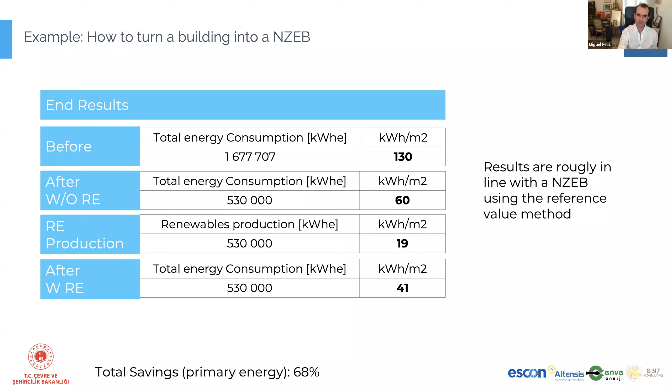So you'll see that this building, using these kinds of references, gets a nZEB status. We have an A class, we have production, a much more efficient building, and a decrease in primary energy consumption. As you can see with this fairly normal example, we show it is not impossible to get a nZEB building with these rules.

Of course, building location and building type helps. This is a fairly easy climate zone, not in the deep heating north or the deep cooling south, so it's fairly easy. We see that we don't have occupation when the cooling loads are bigger, it's summertime, the school is closed, so it's fairly good to have this kind of profile, especially because the school didn't have a cooling system.

So in this sense, the reference building and the real building are perfectly matched with the real needs. The building has low insulation, so it was easy to improve.

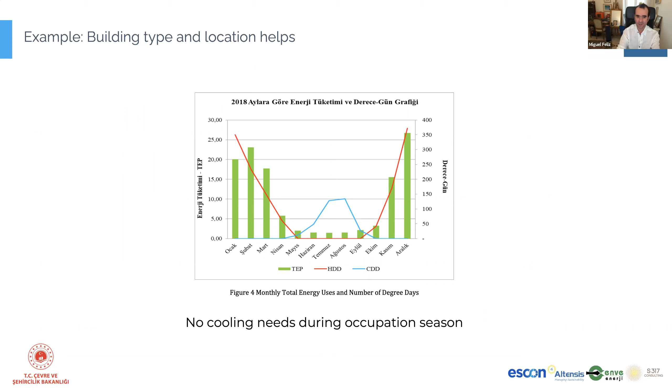So it's fairly common ground to change gas, for example, for electrical, even if you decrease the primary energy intake because of fuel switching or efficiency measures. These examples show that building type and location really help, insulation helps because it's fairly easy to go up, and electrification will be a solution you'll see in the future, not just in buildings but also in transportation and industry.

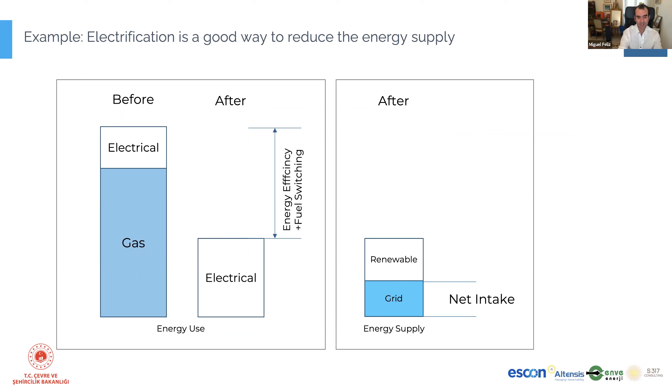Electrification is the way to go. If you take out hydrogen, electrical power is the way to go because it's fairly easy to treat. So typical measures, like I told you, are not much different than the measures we normally talk about: insulation, changing the boiler for a heat pump, LEDs, and PV generation.

You can also easily use condensing boilers, for example, a little bit more efficient. Changing the motors and putting variable frequency drives in all the electrical plugs, making sure we have good building management systems in place, changing for biomass boilers. It's not easy to do in every territory, but that hospital I talked to you about reached class A because they changed the boilers for biomass boilers.

They have emissions, but they have zero primary energy, so it's a fairly good solution. Of course, ground source heat pumps, when available, are a very good way to go. Or cogeneration, having solar thermal hot water production, and cool chillers with variable frequency compressors for some more cooling power solutions.

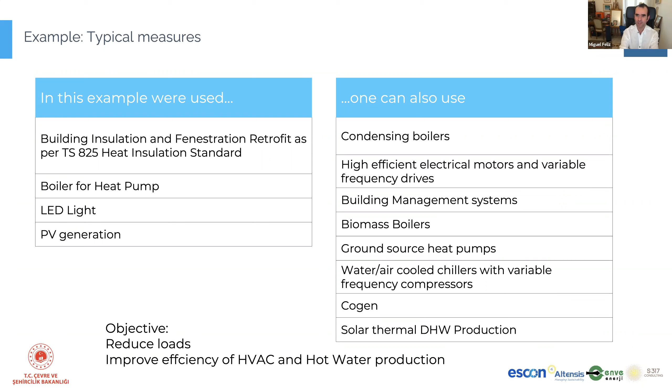The objective is always reducing the loads and improving the efficiency of HVAC and hot water production. As you can see, it's not different from the normal audit. Maybe here we have to go a little bit further in the reduction to make sure we come up with a really low consumption, high performance building.

Summary of the last part, we are almost finishing. Renovations can also achieve the nZEB status. It's not difficult, it's not impossible, it's not easy, but it's doable. Building type and building use are really important, and there are some typical measures that can be used for this.

So thank you for this. These 2-hour sessions over Zoom or Teams are not easy to do. I guess it's not easy to listen to.

Our project will take one more year, so we'll have time, I think, for in-person sessions to get over this again. We have a lot of work to be done yet in the nZEB department of this project, so I think this is the first conversation, not the last, regarding this.